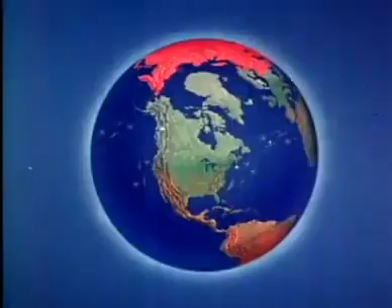Sprawled across North America, from the polar ice cap to the Mexican border, is a giant with 1,000 eyes. Day and night, fair weather or foul, he guards his homeland. This giant is the air defense system of North America, a vast and intricate maze of radar networks. And through the electronic eyes of this giant, we are able to see the enemy before the enemy sees us.

These radars never sleep. Round the clock, they stand ready to do their part in minimizing the penetration of enemy bombers. And round the clock, their quietly pulsing hearts, the magnetrons and the klystrons, help generate the power for peace that keeps America strong.

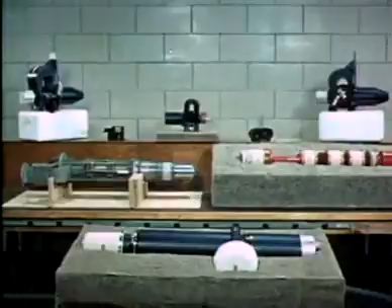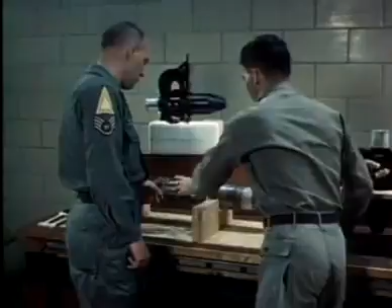These microwave power tubes, the magnetron to generate the radar signal, the klystron amplifier for radio communication, and radar are the subject of our story. It is a story about these vital tubes, but even more about you, the men who work with them. When you have a well-trained maintenance man with a well-adjusted radar at a well-chosen site, then you've really got a winning team.

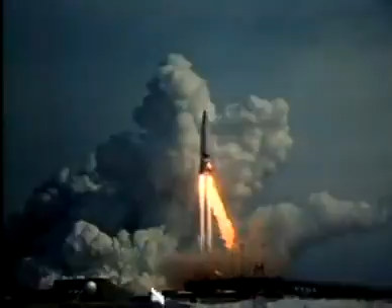They keep the airborne radars operating and ready for crucial missions. In missiles that depend upon radar for guidance. In bombers that depend upon radar for bombing and navigation. In interceptors that depend upon radar for fire control. And in reconnaissance and search aircraft that depend upon radar to extend their vision.

Years of scientific research and millions of dollars worth of equipment have gone into this aircraft. But only if the maintenance men keep the radar functioning can it complete its mission. When something goes wrong, they've got to make a quick decision, whether to attempt repairs in flight or abort the mission.

There's trouble here, that's for sure. But what kind of trouble? First, they check the radar scope presentation. Sometimes this gives a clue. But the most reliable analysis comes from the test equipment on the monitor panel.

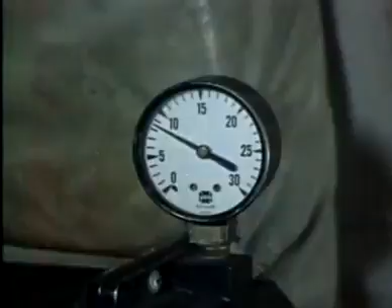Another trouble spot could be the pressurized antenna system. Loss of waveguide pressure will also cause arcing. Yes, the pressure's low. This is a danger signal. If this arcing continues, the magnetron output window may be damaged, the tube's vacuum lost, and the magnetron destroyed.

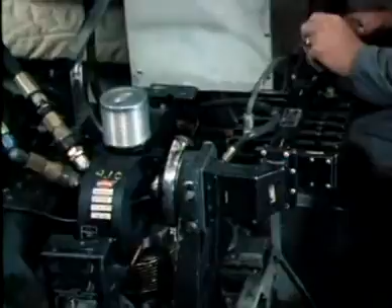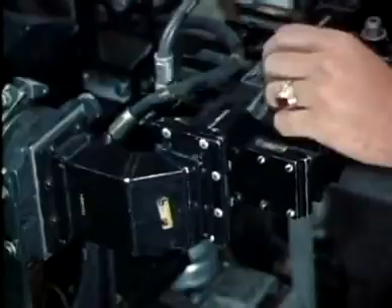Waveguide joints should be tested to make sure they're airtight. This man is making a liquid soap test. See where the bubbles are forming? He's found the trouble. But how serious is it?

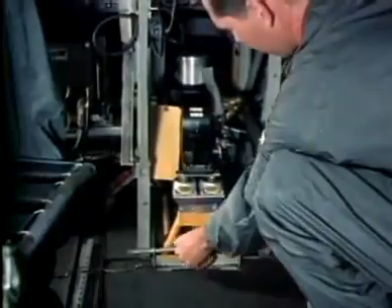He checks the spectrum analyzer again. It looks bad. See how the pulse has changed? Finally, the main pulse deteriorates completely. Bad news. The magnetron is seriously damaged. It's beyond repair. This means shut down the equipment and get ready to install the spare.

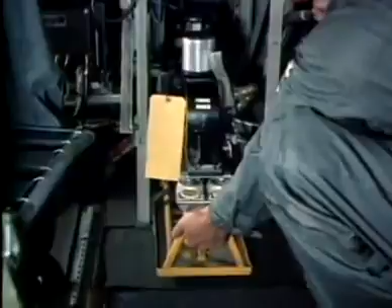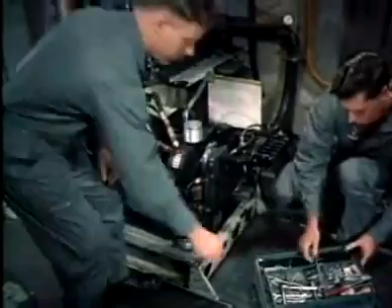While they're working, let's take a look inside the magnetron. Animation shows what caused the malfunction. We'll turn time back a few hours and show the Maggie functioning normally.

As the pulse from the modulator is applied, the Maggie produces radio frequency oscillations to form the radar pulse. This energy is then coupled into the waveguide and directed to the antenna for transmission.

Energy is reflected back along the waveguide toward the magnetron. Normally, when the antenna system is in good shape, the reflected wave won't be strong enough to cause arcing at critical points.

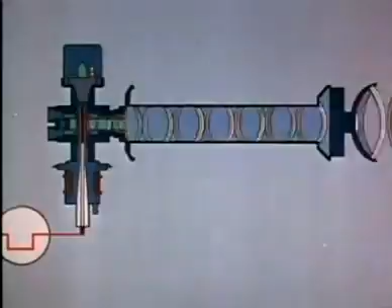But as conditions such as loss of waveguide pressure develop, the antenna characteristics change and the reflected wave becomes greater. Then arcing may take place at the point where the radar wave leaves the magnetron, causing the magnetron output window to crack or puncture.

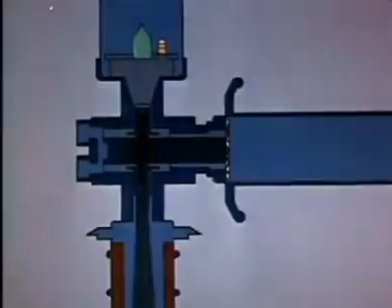As the vacuum is lost, the heater oxidizes and burns out. The cathode cools. Air seeps into the interaction space, and arcing occurs with each pulse.

After the magnetron has been unbolted, the filament and cathode connections are uncoupled. A large magnetron like this one requires 2 men to handle it safely.

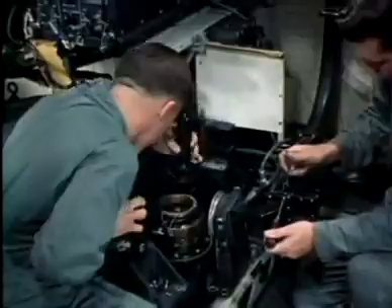Before a Maggie is replaced, all connections, mating flanges, and sealing surfaces should be inspected. Insulating oil should be examined for foreign matter. Damaged or worn gaskets should be replaced.

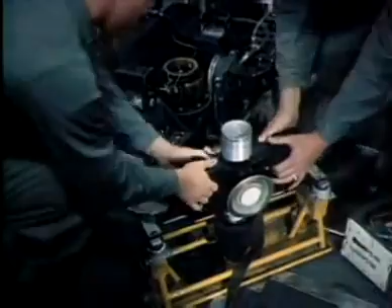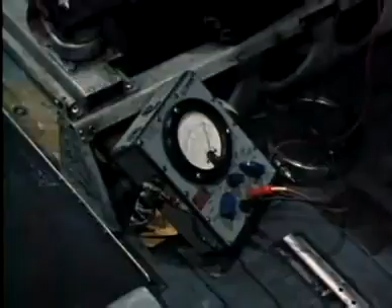Heater's supply voltage should be established at the value marked on the tube. Later, when the plane returns to base, the heater voltage should be double-checked with an accurate instrument.

Now that the spare magnetron has been installed, further tests are necessary. The technician must make sure he has the required pressure and that there are no air leaks. Instructions concerning the care of pressurized antenna systems will be found in the appropriate tech order handbook.

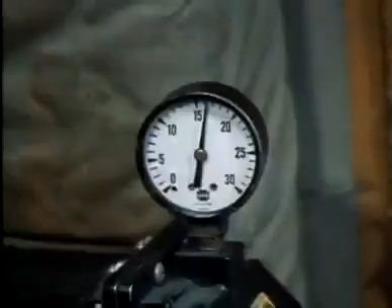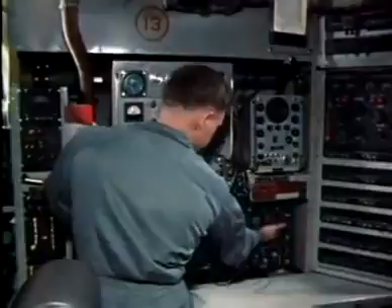The liquid soap method is a simple way to check for pressure leaks and may be used where more accurate means of testing are not available. Test equipment is used to analyze the performance of a newly installed tube.

The output pulse is checked on the spectrum analyzer. See how the large hump or main bang is symmetrical and sharply defined. The side lobes are relatively small. A presentation like this means that the Maggie is firing properly.

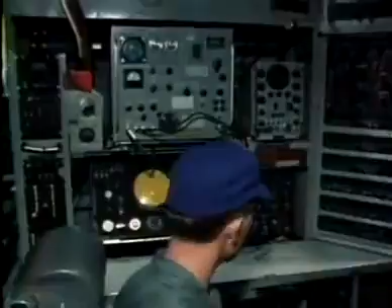Not only that, it means that these technicians know their jobs. They were able to analyze the trouble correctly and replace the magnetron in flight. Because they knew what to do, this aircraft was able to complete its mission.

Let's take a closer look at these microwave power tubes. Magnetrons costing from $100 to $10,000.

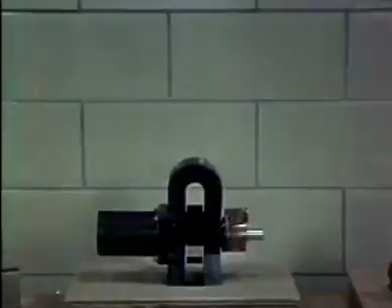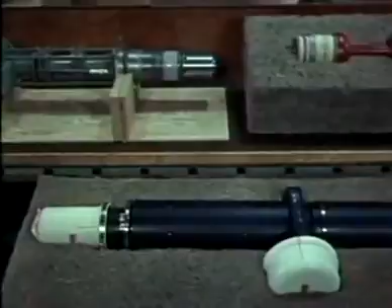Klystrons costing from $1,500 to $25,000. Why so expensive? Let's see what's inside them. Look at this. Parts so critical, they must be inspected through a microscope.

Tolerances accurate to 4/1000ths of an inch. To build them to such close tolerances requires involved manufacturing processes. Specialized parts must be carefully assembled.

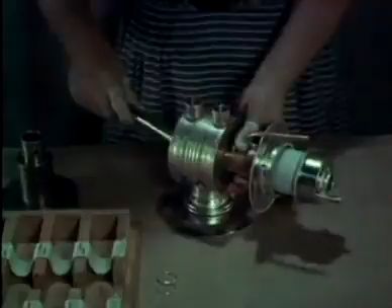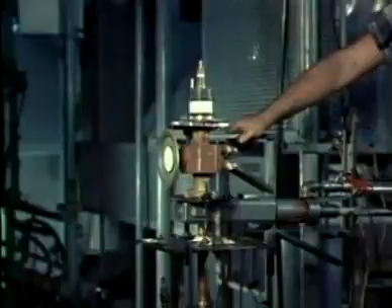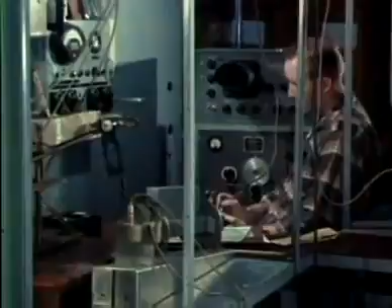The completed assembly is heat-treated to bake out gas molecules, so that they may be removed by an evacuation machine. External mechanical parts, such as couplings and magnets, are installed. The final step is rigid testing of electrical performance to make sure it meets the high standards required.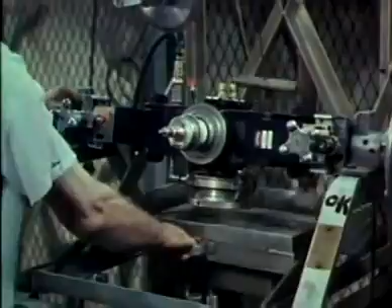Pressure tests ensure leak-proof connections throughout. Now the tubes can be put into storage. Even here, should tiny defects develop while on the shelf, continuous sample testing will reveal them. Before shipment, the delicate tubes are carefully packaged.

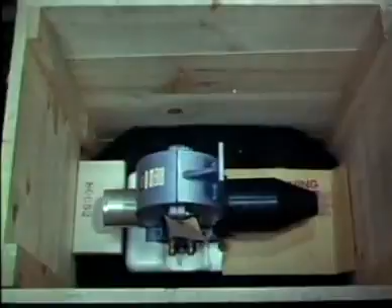The quality designed in during research, built in during manufacture, maintained by rigid testing and careful storage, will reach the user intact.

Here are a few basic rules on proper handling. Always use 2 men to lift a heavy tube. A portion of a carton makes a good tube stand, protecting delicate parts from damage. But a wooden rack is better and lasts longer.

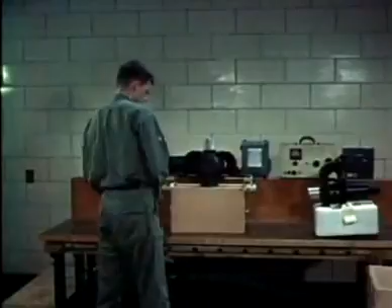Save all the cartons and packaging materials. Use them to return defective tubes to the factory.

Magnetrons should be separated at least 12 inches. Then their magnetic fields won't interlock. Don't store them on steel shelves or they may be degaussed.

Don't use steel tools. Use non-magnetic tools. Following these simple rules will save time and trouble, prevent damage, and save the Air Force many thousands of dollars each year.

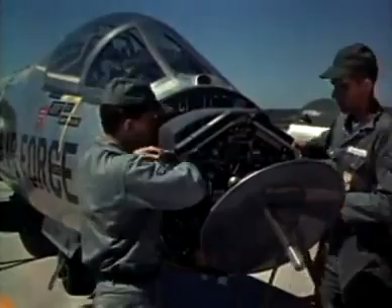On most of the smaller high-performance aircraft like this one, it is not possible to do in-flight radar maintenance. Therefore, most of the work must be done in the electronics maintenance shop. This aircraft has just aborted an intercept training mission. The reason: radar malfunction. Had this mission been the real thing, an enemy bomber could have broken through our defenses.

The maintenance man's job is to find out why the radar malfunctioned and correct the trouble. You'll see that although these radars come in smaller packages than those on larger aircraft, they are just as big a maintenance problem.

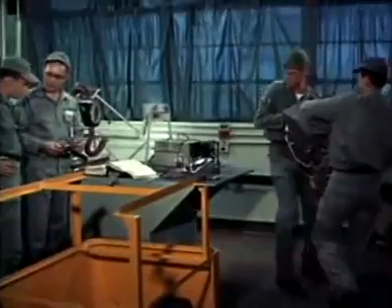The maintenance supervisor is in charge of this work. Before teardown of a defective black box is started, the operational defects should be identified or at least isolated to a particular subchassis. The pilot's report on the radar failure may give a clue.

Comparing the report of malfunction with equipment handbooks may also help to isolate the defect. But the best aids to repair are the analytical approach of the technician and the special test equipment he uses.

An important point to remember is that the transmitter malfunction may be caused by parts other than the magnetron. Wherever possible, other circuit components should be checked before power is applied.

A simple resistance check will often reveal a short circuit. That's what the trouble is here. The airman will carry on from here and trace the short circuit.

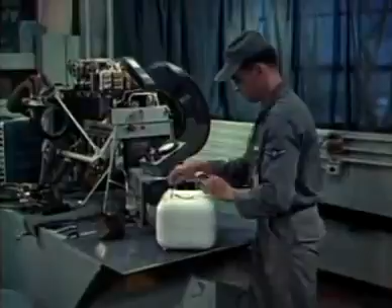So far, so good. He's found a shorted filament transformer and replaced it with a new one. But what's this? He's decided to change the magnetron, too.

The supervisor disagrees. Tube swapping is not a good idea. The old magnetron should be thoroughly tested before any decision is made.

Testing showed that the old magnetron should be replaced. This has been done. Now let's see how the new Maggie behaves.

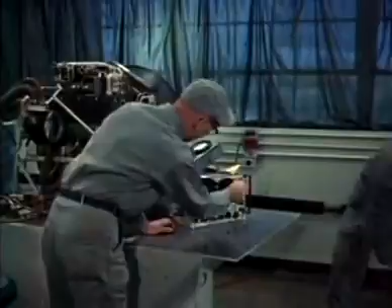This is confusing. The spectrum analyzer shows arcing. Let's look inside the tube and see what's causing it.

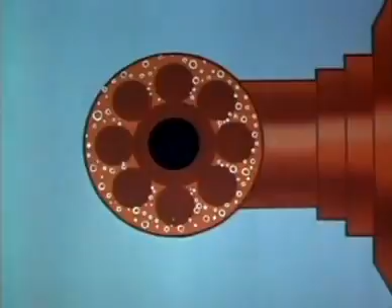Magnetrons are made of porous metals, which usually trap a small amount of residual gas. During storage, gas molecules migrate into the interaction space surrounding the cathode. When the tube is installed and power applied, it will operate normally if the gas content is low.

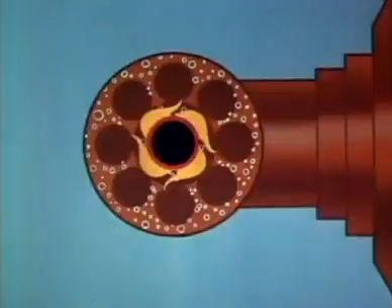But if gas content is high, arcing will occur with each modulator pulse. This arcing might be mild or severe. Frequently, tubes with residual gas can be restored to normal operation by a suitable break-in or seasoning period.

During break-in, the gas molecules are driven back into the walls of the tube, and normal operation resumes. If the equipment is operated frequently, normal operation should continue throughout the life of the tube.

Occasional individual arcs may also be noted in a normal tube which does not contain gas. But this behavior is due to transient conditions and should be considered as normal.

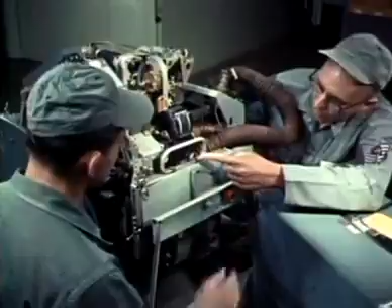All new tubes which display arcing when they are first installed should be thoroughly tested and analyzed before being discarded. This will save the government both time and money.

The repairs are finished. Now comes the break-in procedure. Proper break-in can clear up various degrees of internal arcing. But watch the spectrum analyzer carefully. If frequent arcs occur, switch to standby immediately.

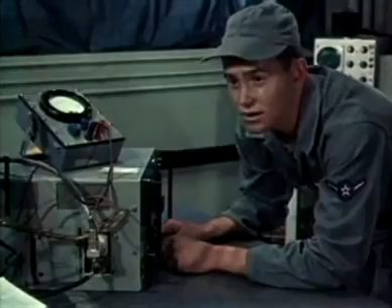Small magnetrons may be damaged if severe arcing is allowed to continue more than 2 seconds. Now the range selector switch must be changed to short pulse before the magnetron is operated.

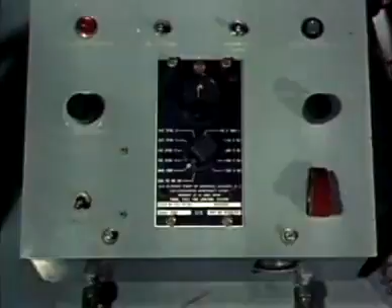If only sporadic arcing occurs, the operation may be continued. But a series of arcs may cause the overload to pop. In this case, reset the switch and continue the break-in.

To avoid possible damage during the break-in, the technician should keep a close watch on modulator tubes and other components of the RT unit. The time required for break-in will vary with the tube, conditions, and methods used, but normally break-in can be accomplished in 20 to 60 minutes.

When break-in is complete, and only infrequent arcs or misfirings occur, operation may be regarded as normal, and the equipment made ready for service.

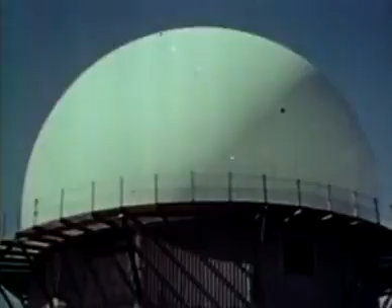In addition to the airborne radars, there are a great many ground radar sites scattered about the continental United States and Canada. They are found in almost every type of American scene: in the dusty expanse of the plains, in the Northwoods, the heat and humidity of the deep South, in the rolling farmlands of the Midwest, and the saltwater scenes of our coastal areas.

Each of these has its own problems of maintaining and efficiently operating its microwave power tubes on a round-the-clock basis.

Some of this equipment is completely automatic, but experienced technicians are always nearby, just in case. At the many radar sites where there is no standby equipment, the maintenance man is an even more vital unit in the organization.

In the operations room, observers keep constant watch on the radar scopes. Here's trouble developing.

When equipment starts to malfunction, quick repair is a must.

These men are so used to the sound of the equipment, they can tell by listening whether the magnetron is operating or not. It's not.

Something caused this radar to quit. What was it?

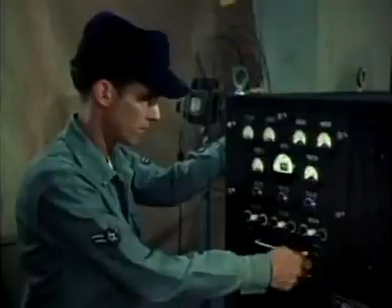Sometimes the meters will tell the story. The filament current has dropped to zero, and the filament voltage is too high, indicating that a portion of the heater element is open. A quick, careful analysis has to be made.

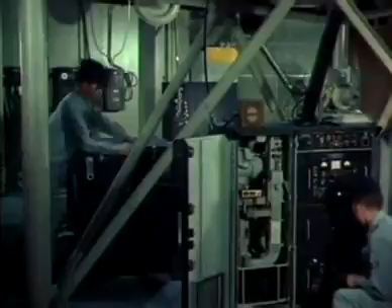Here is where maintenance skill and training pay off.

The question is, has the magnetron become inoperative because of heater failure? Or is there another cause?

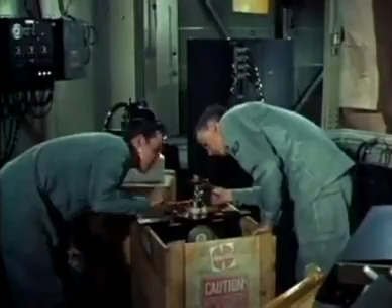Yes, here's something. The insulator is pitted. High-powered magnetrons like this one have insulator bushings immersed in oil. It might be that the insulating oil has broken down. Better check this.

Here's the answer: contaminated oil. The oil failed to insulate. Oil can break down after long exposure to heat and high voltage. Oil may also be contaminated by dust, moisture, metal particles, or air bubbles.

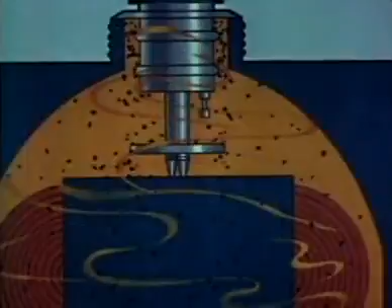Here is how contamination breaks down oil. As contamination accumulates in the oil, current paths are created between high voltage terminals and ground. As the condition becomes worse, due to increase of contamination and change in oil structure, a definite high voltage path for corona discharge is created in the oil.

The corona discharge begins to erode the surfaces of the insulator. As the insulators are penetrated, the vacuum in the tube is destroyed, and the tube is damaged beyond recovery.

The maintenance men have completed oil replacement using all precautions to prevent contamination. They have checked the grade of oil against tech orders and factory instructions.

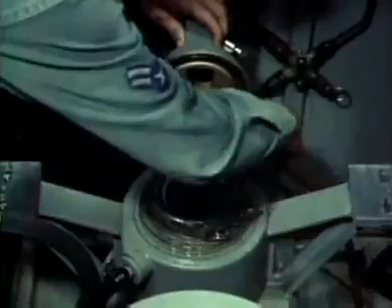But before installing the new Maggie, all mating surfaces and flanges must be inspected and cleaned or replaced as required. It is also necessary to check waveguide parts, replace gaskets, coolant hoses, oil fittings, and so forth.

Be sure all electrical connections are secure.

Careful, watch out that terminal doesn't hit the cabinet. That could ruin the tube.

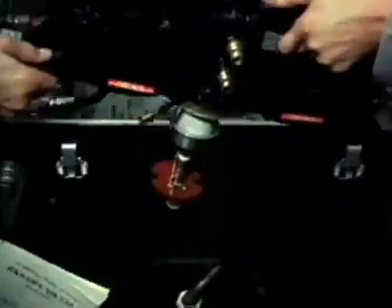Make certain that all clamps, bolts, coolant hoses, and so forth are secure before operating the tube. All set? Okay, hit the power button. Uh-oh, that one didn't last long.

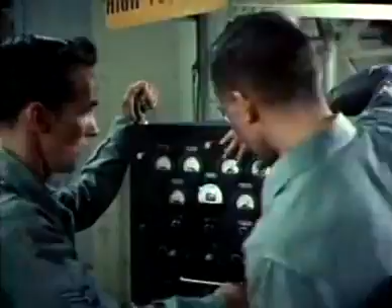There are many reasons why new tubes may fail to function properly. One of the primary causes of tube failure is damage sustained during transportation and handling. This damage may occur during shipping or in the depot, or during Air Force distribution to the base.

Here is what actually happened to that new tube which failed to operate. Nobody saw it happen.

Nobody's going to tell. And nobody's going to get the slightest use out of that magnetron.

But these men don't know this Maggie fell off a truck. They just know it won't work. Could it be something wrong with the rest of the equipment? A short circuit? A bad connection? Or should they pull out this Maggie and install another?

They've installed another new Maggie. They've also followed correct procedure, allowing the heater to warm up 5 minutes before applying power to the anode. Ah, it works.

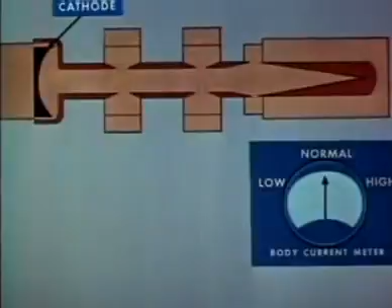Let's look inside a typical two-cavity power klystron and see how it operates. The beam current is emitted by a heated cathode and passes through the drift tube sections.

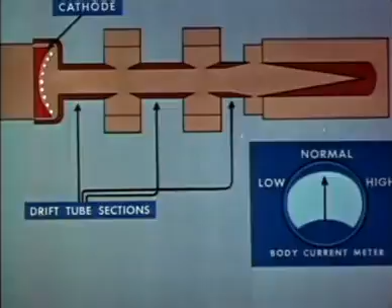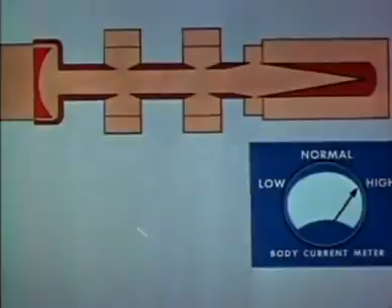Since electrons in the beam have like charges, they repel each other and tend to diverge, to be absorbed by the walls of the drift tube sections. But electromagnetic coils placed along the tube align them into straight paths. However, misalignment of the focus coils can seriously damage the drift tube tips. Therefore, it is most important to adjust the magnetic coil currents properly during installation of the tube.

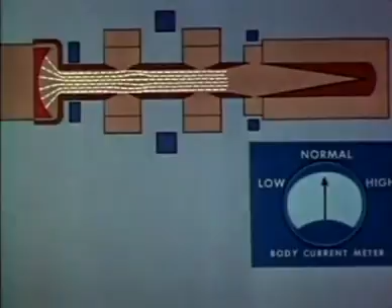When a steady direct current is flowing through the tube, an RF signal from the RF driver stage is introduced into the first cavity resonator. As the cavity is tuned to resonance, a strong RF field appears between the drift tube tips, which form a gap in the resonator.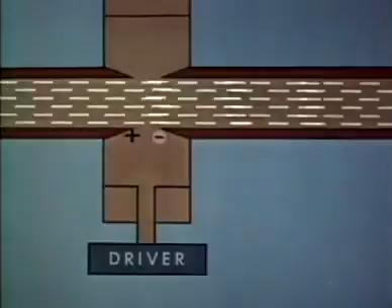The electrical charges on these tips alternate at the driver frequency rate on opposite sides of the gap. At the same time, individual electrons in the beam are being accelerated or decelerated at the RF frequency rate. This produces bunching of the electrons as they approach the gap in the second resonator. There they are decelerated and release energy. The resonator converts this energy to RF energy and amplifies it.

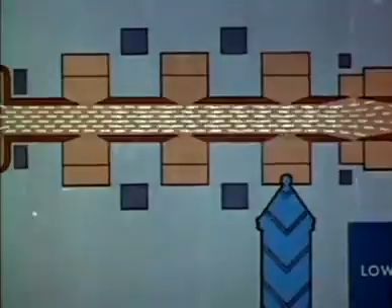Additional resonators are sometimes provided for greater amplification. From the last resonator, the amplified RF signal is coupled into the waveguide and transmitted to the antenna.

Various kinds of klystrons are being phased into new Air Force applications, such as these tropospheric scatter communications transmitters. In this way, intelligence may be relayed from remote early warning sites to control centers many hundreds of miles away.

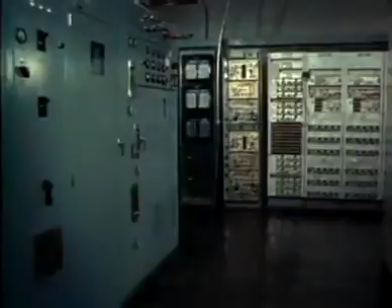This transmitter has dual equipment. One transmitter operates while the other is on standby in case of emergency. The equipment is automatic. Meters and instruments keep a constant check on its operation, and a warning light flashes in case of trouble.

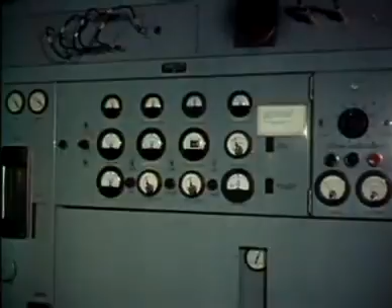And speaking of trouble, a glance at the meters tells them the trouble is in the transmitter output. The equipment is reoperated.

Readjustment of the output cavity and coupler may correct the trouble, but the arcing continues. Since adjustment won't correct the trouble, all they can do is shut down the transmitter for repair and switch over to standby.

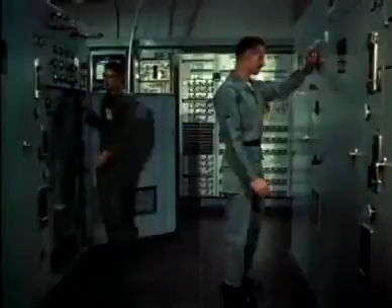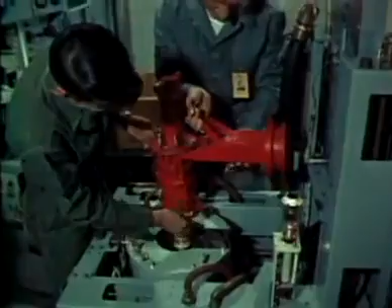The klystron has been removed for inspection. It may have been damaged by the arcing. Yes, the output ceramic is badly damaged.

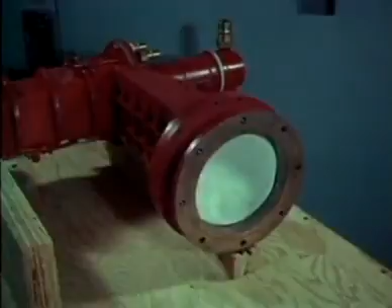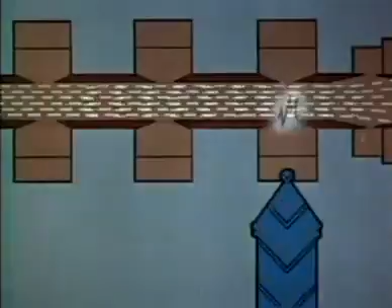An important consideration in maintaining the klystron is the proper adjustment of the impedance matching unit. In this case, improper adjustment of this unit during installation ultimately caused the arcing in the output section, which in turn destroyed the tube.

There are two types of meters which help maintain proper coupling: the power output meter and the VSWR, or voltage standing wave ratio meter. These measuring devices should periodically be checked for accuracy.

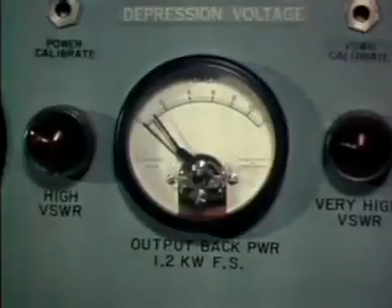But in general, the best way to avoid damaging or destroying the klystron is to study and thoroughly understand the various installation and operating instructions furnished by the equipment and tube manufacturers. Only by doing this can the Air Force technicians and maintenance men hope to get the full operating life from their klystrons.

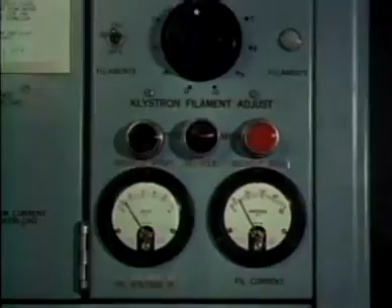At the Tropo Shack, the maintenance men have installed the new klystron. But before operating at full power, they are careful to recheck all circuit meter readings and coolant flow gauges. These meters are important because a minor error in one of the adjustments might shorten the life of the tube.

The power klystron is really a very dependable piece of equipment if properly treated. Once it has been correctly installed and aligned, it requires very little maintenance during its long service life. A good rule to follow is: install it carefully, align it properly, then leave it alone.

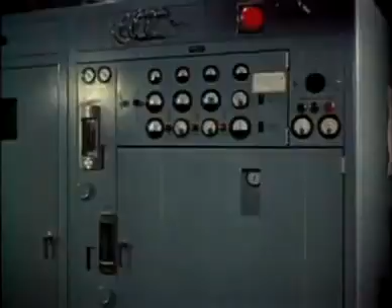As the progress of aircraft and air defense continues, other and more varied uses will undoubtedly be found for microwave power tubes. With these new applications will come new problems to be solved by maintenance men of the future. Those men will tread the paths charted by technicians of today who found that this type of maintenance can be simplified by careful attention to four basic factors: careful handling,

proper break-in, avoidance of tube swapping and trial and error maintenance, and the timely use of maintenance aids such as test equipment, tech order handbooks, and manufacturer's information pamphlets. There is no substitute for know-how, initiative, and ingenuity.

Yet no one man or group of men can do this job alone. Maintenance is a team effort. Only by the cooperation of procurement, supply, transportation, and every department concerned can the Air Force continue to operate the reliable radar equipment which is such a vital part of national defense.

Only by continued teamwork and devotion to duty can the radar eyes of America guide us to that peaceful tomorrow, which is the reward of nations who stay alert today and every day.